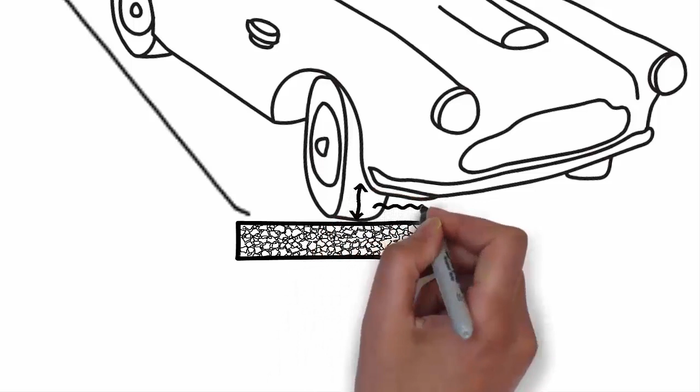How to design a pavement that will serve just as long on a highway as it is serving on a pedestrian pathway? We can try to predict the pavement properties using performance-based test methods even before we pave the asphalt. In laboratory, we can test rutting to make sure lorries can use the road, we can test fatigue to make sure it will last long, and we can test low temperature cracking for roads that have to survive colder climates.

But why suddenly start testing performance if we have designed pavements for many years without ever doing it? Well, it used to be simple. Take the mineral aggregates, binder, and mix them together. Through long-term established correlations with the field performance, we knew what gradations, binder content, and air void volume will deliver the longest lasting asphalt pavements.

The times have changed. We drive ever heavier lorries, so we need to use polymer modified binder. We don't want to harm the environment, so we use warm mix asphalt. We would like to reduce costs, so we recycle old pavements. We hate traffic jams while the road is being repaired, so we design longer lasting pavements. We need to help other industries to recycle, so we use tires and other waste materials in asphalt.

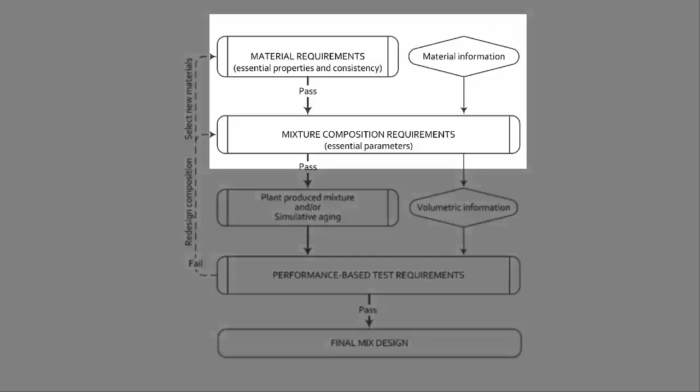Even the binder doesn't stick to the rocks as it used to 10 years ago because of the changed refining technologies. All of this is moving asphalt beyond the narrow margins for which traditional mix design holds true. We need to adapt. Performance-based test methods allow to evaluate the final product, asphalt mixture. If adequate test methods are chosen, we can avoid relying on volumetric parameters as the sole criteria and directly test mixture performance. The constituent material and mixture composition requirements should be kept to minimum to allow innovation.

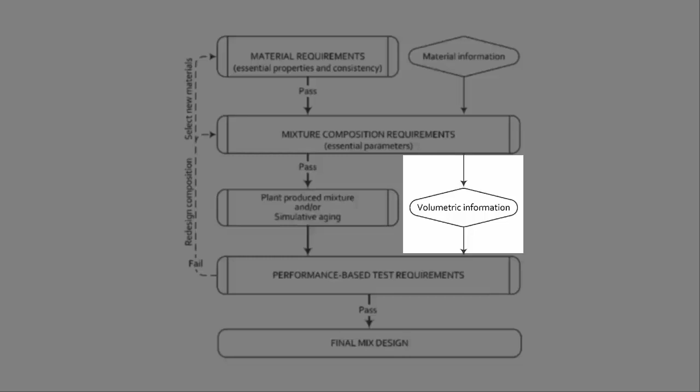Instead, information regarding the materials and volumetrics should be collected to aid in optimization of mixture performance. Next, aging should be performed on samples to simulate field conditions. And finally, the mixture should be tested using the chosen performance-based tests and verified against the specified criteria.

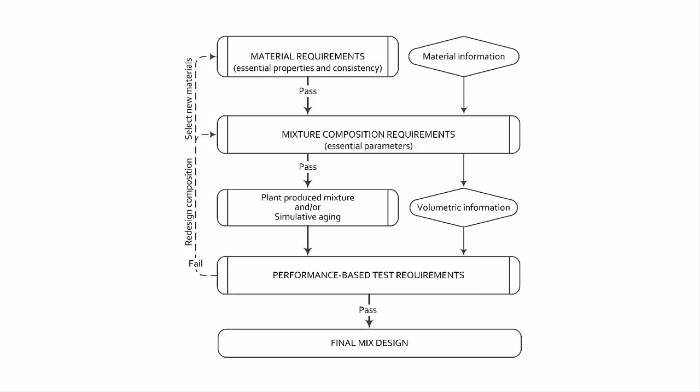In order to help designing mixtures based on performance, I have summarized findings from 200 literature sources and created a table that tries to predict possible consequences of changes in mix design. The table lists effects of 17 different parameters on 6 performance indicators. It was created by searching what would be the most likely trend of a performance-based test when changing a particular mix design parameter. Let's look at an example.

Say you have too much rutting in your asphalt. What can you do? You could use a harder binder, but that will reduce cracking resistance and workability. You could also use more angular sand, but you have to remember that this will require more compaction effort to avoid overly high air void content.

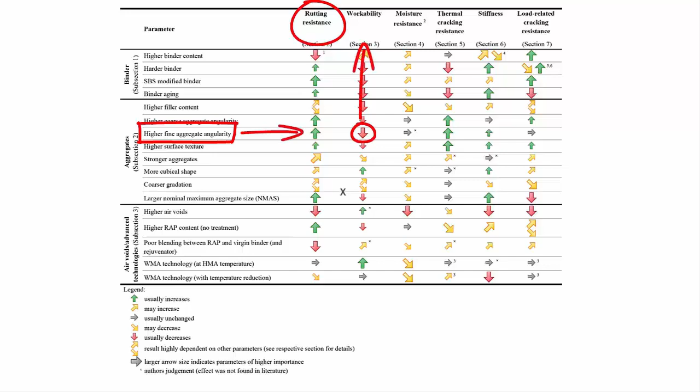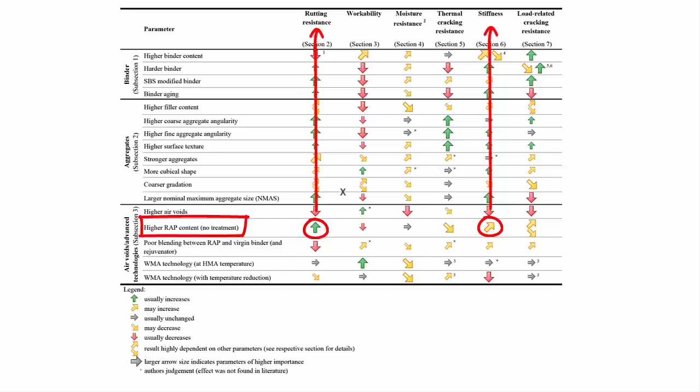We can also take a look from the other side. Let's say you want to use high content of reclaimed asphalt in the mixture. What changes should you expect in the performance? The rut resistance is going to improve and stiffness will rise, but fatigue might get compromised just like low temperature cracking.

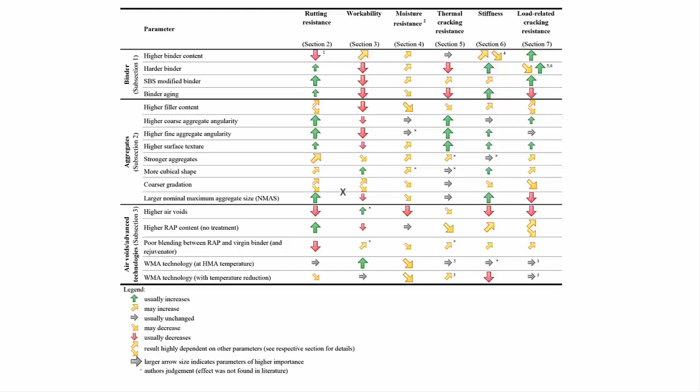Make no mistake, asphalt is a very complex material, and this table is a simplification of the different effects that we can expect. Moreover, we do not yet have tests that can fully predict the pavement performance. But what are the alternatives to advancing performance-based tests? We could run business as usual. Tailor the existing volumetric requirements by adjusting the empirical relationships each time new materials or technologies are introduced. This, however, slows the innovation process, and in some ways this is similar to chasing a leaving train.

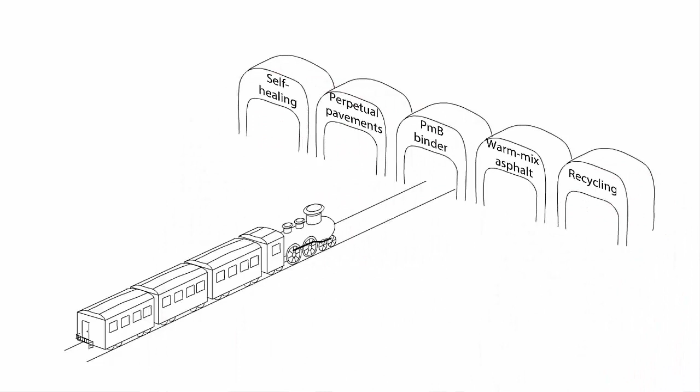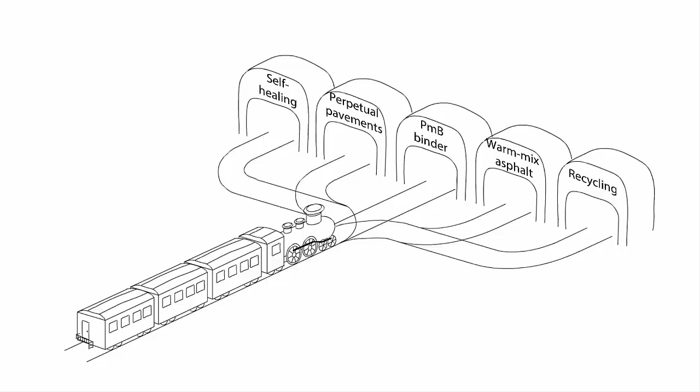A more promising approach would be to introduce performance-based tests for design and quality control of asphalt mixtures. In this way, contractors would be given the tools that are necessary to encourage development and approval of innovative solutions leading to increased durability, improved cost effectiveness, and reduced environmental impacts. Instead of chasing the train, by using performance-based mixture design, road agencies would actually lay down the track to the direction they wish the innovation to be steered, while allowing the contractors to be the locomotive that drives the advancements.